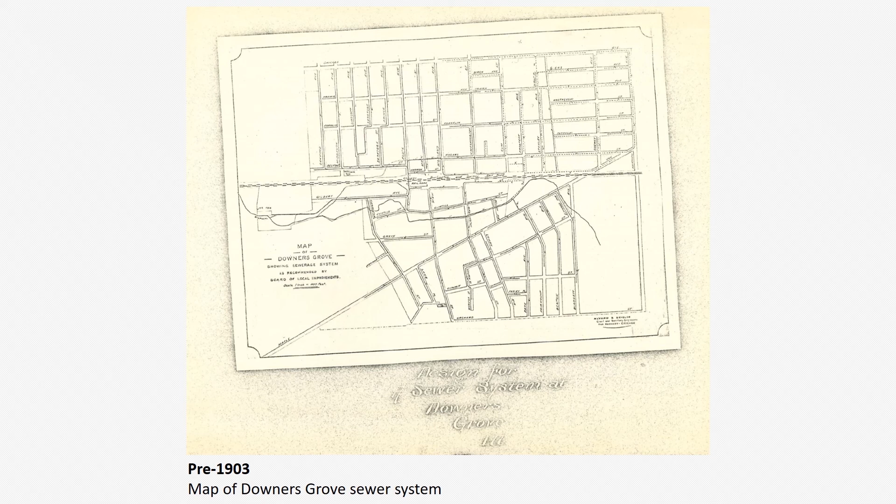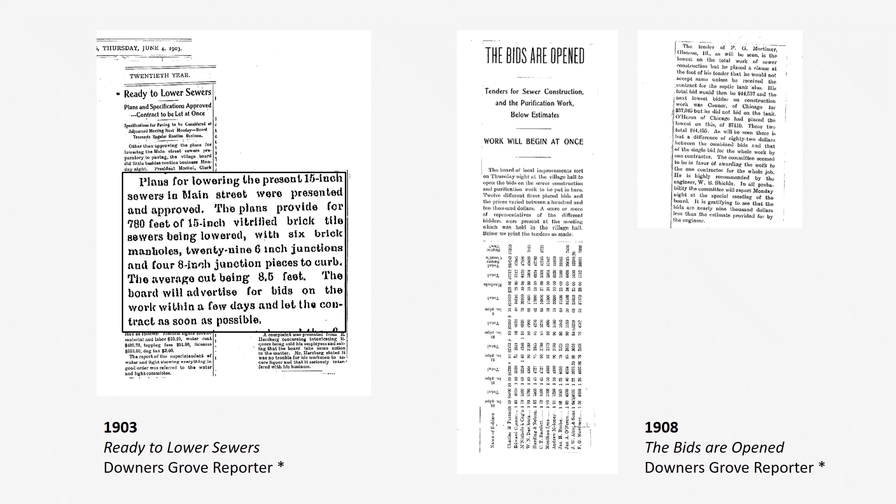In 1904, the disposal plant was placed into operation. The disposal plant was located where the ball field is in present-day Gilbert Park. It contained a septic tank and an intermittent sand filter.

District records show that over 47,000 feet of sanitary sewer in the village of Downers Grove dates back to 1904 and 1908. This district has only replaced approximately 2,000 feet of this pipe. The rest still remains in service today.

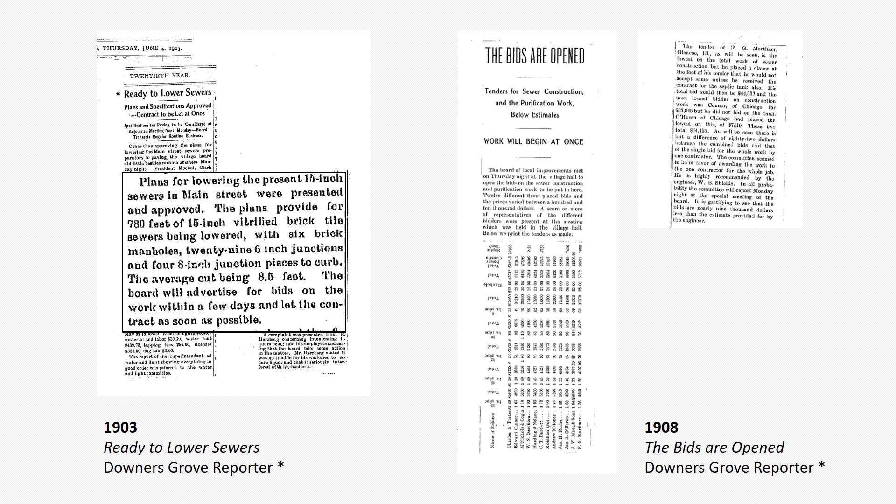Hello, this is Jessie Guad, Safety Coordinator. Now, let's take a look back at the first 30 years of the district's existence.

As the population of the village of Downers Grove and the surrounding areas grew rapidly in the early 1920s, the sewer system was extended into the Westmont area. As this was beyond the jurisdiction of the village of Downers Grove, the Sanitary District was formed in 1921 under the provisions of the Sanitary District Act of 1917.

Upon formation, the district acquired the sewer system and assumed operation of the village's disposal plant. This plat shows the original boundaries of the Sanitary District. The future location of the first treatment plant built by the district is also shown on the plat. It was located east of Belmont Road on St. Joseph's Creek.

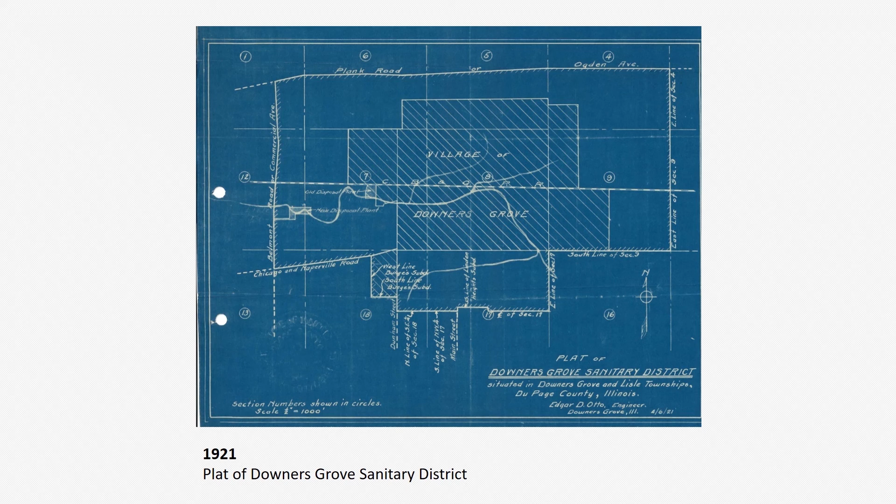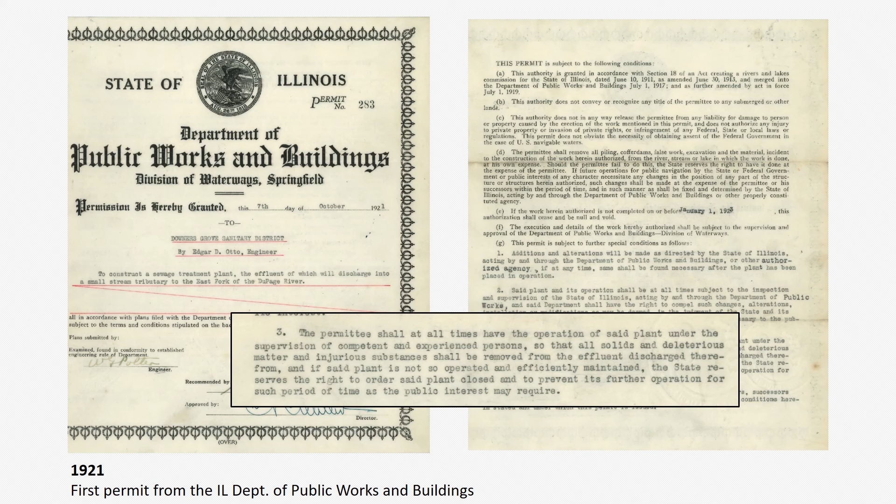In October of 1921, the district received its first construction permit to build the before-mentioned treatment plant. The permit was issued by the state's Department of Public Works and Buildings. The permit was also an operating permit, requiring the plant to be under the supervision of competent and experienced persons, and that all solids and deleterious matter and injurious substances be removed before the effluent was discharged to the creek.

Bids for the sewage treatment plant were opened at a Board of Trustees meeting in January 1922. The notice of award shown here indicates the plant costs $61,219.50, which would be approximately $4.4 million today.

The plant was built in 1922 to replace the old Village of Downers Grove disposal plant. The new plant was designed for a population of 5,000 and a flow of 0.35 million gallons per day.

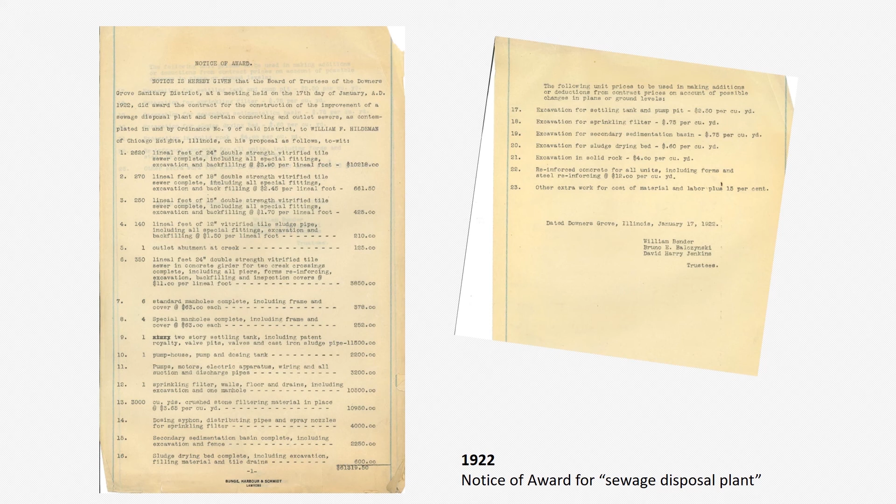Representatives from the Downers Grove Sanitary District were present at the first annual meeting of the Illinois Association of Sanitary Districts in January 1924. The association, which is now the Illinois Association of Wastewater Agencies, promotes the mutual interests of the wastewater agencies in the state of Illinois, including advocating on their collective behalf to the legislature and regulatory agencies.

Since that inaugural meeting in 1924, the district has been a highly active member of the association, having many employees who served on the executive board and as committee chairs.

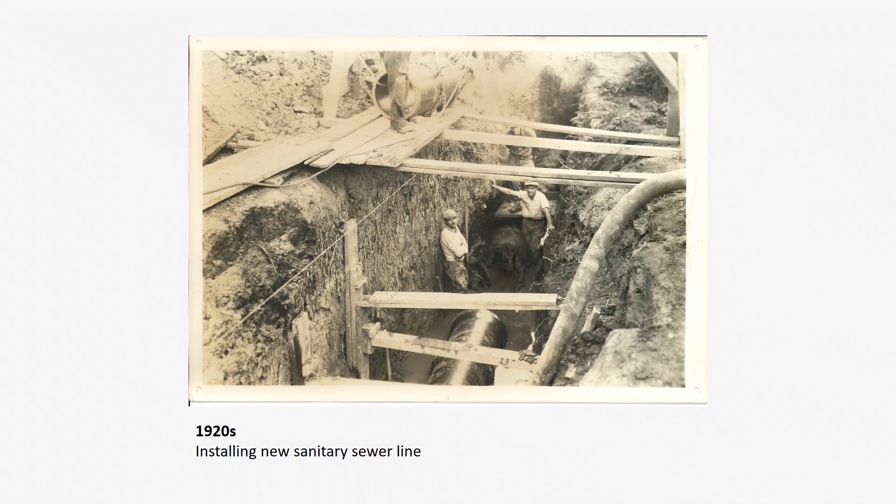The district began installing sanitary sewer mains in the mid-1920s, as shown in this photo.

Sewers completed under the district's first special assessment were installed in 1925. The district has completed 58 special assessments over the years, with the most recent in 2009. It still remains a mechanism by which a group of properties could become sewered today.

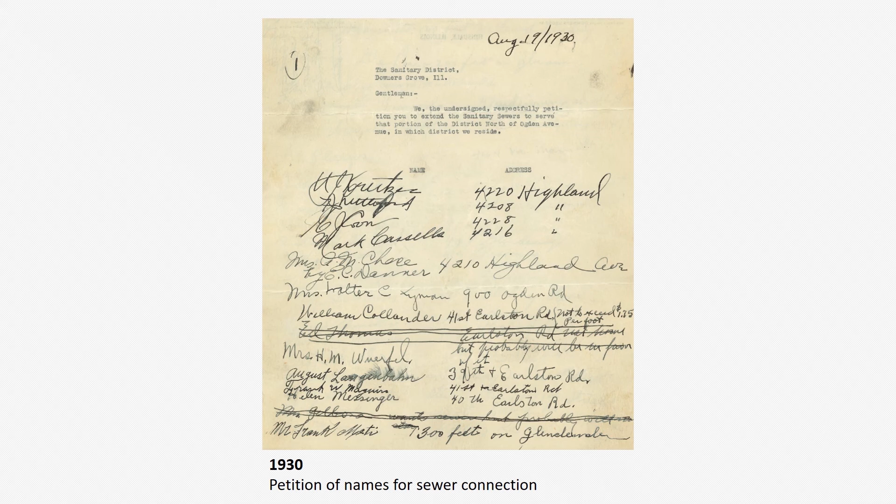By 1930, the population in the district had grown to over 10,000. The sewage treatment plant was expanded in 1931 to treat a flow of 1 million gallons per day. The plant contained Imhoff tanks, a sprinkling filter, and a final settling tank.

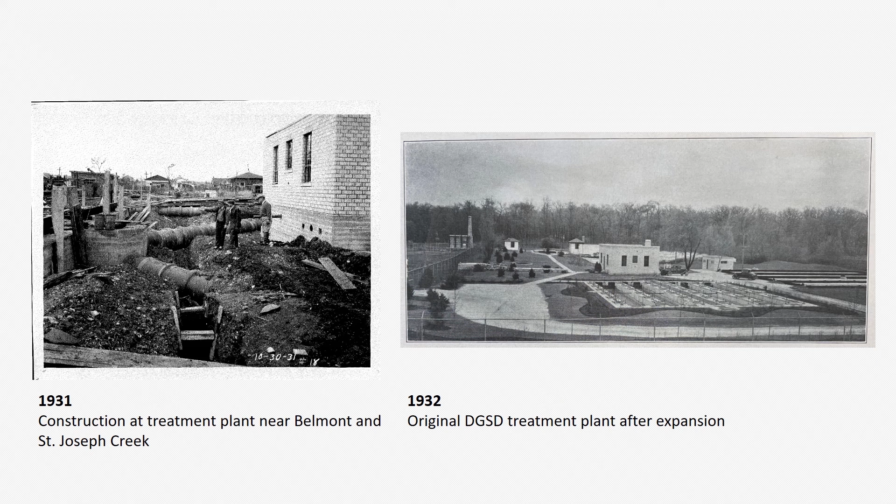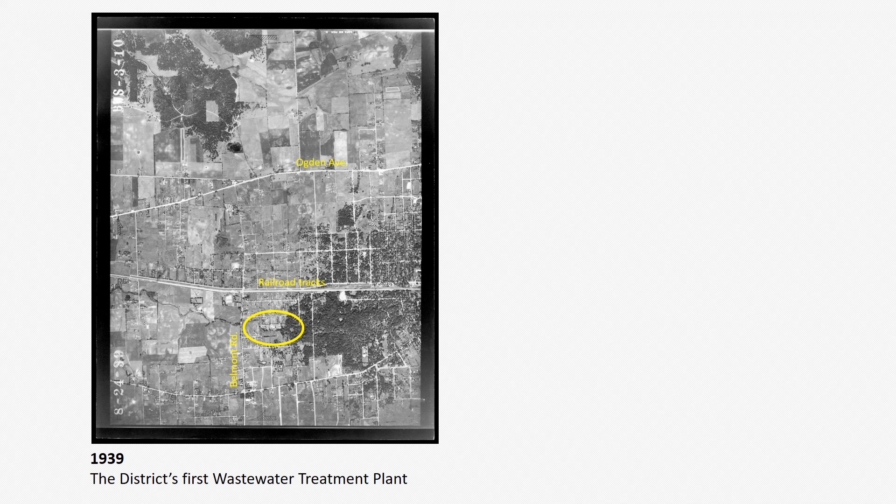This aerial photo from 1939 shows the location of the first sewage treatment plant constructed by the district, just east of Belmont Road on the north edge of St. Joseph Creek. By the early 1950s, the population of the district had grown to 17,500, and it was once again determined that this plant was overloaded.

At that time, the district began planning for a second wastewater treatment plant. The treatment plant at this site was used until the mid-1960s, at which time the plant was decommissioned and the site was donated to the Downers Grove Park District to become a public park.

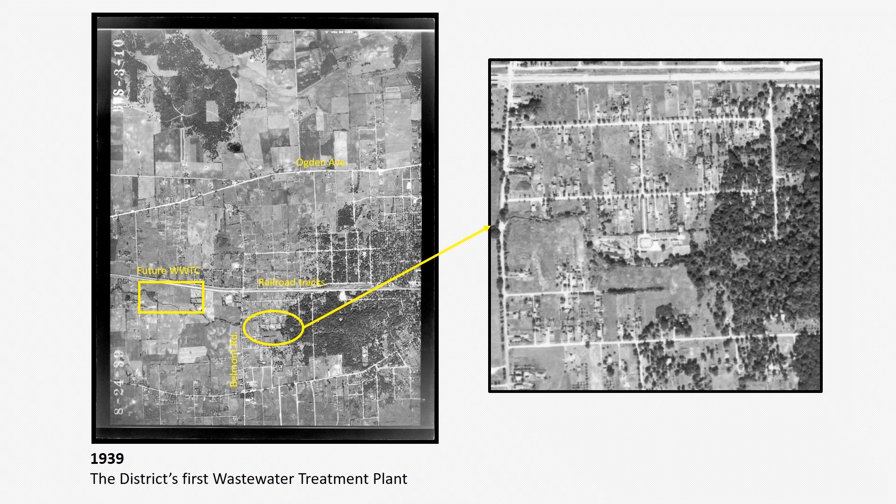Hi, this is Stephanie Choney, Laboratory Analyst. Let's take a look back at the district in the 1950s and 1960s.

As the district continued to grow, a new treatment plant was constructed in the mid-1950s. The photo on the left shows construction of an anaerobic digester. The photo on the right shows construction of the main control building and the primary settling tanks.

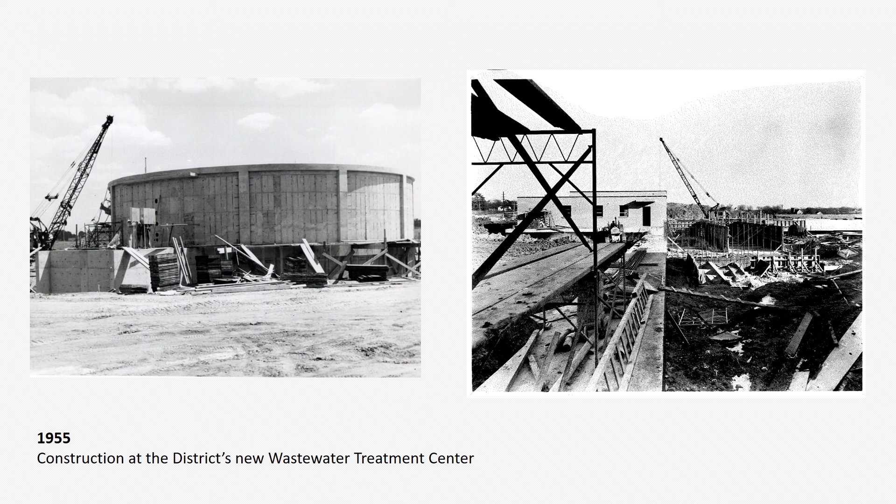In addition to primary treatment, the plant contained an activated sludge process, which provides full secondary treatment and is a much more reliable technology than the treatment processes at the district's first plant. This plant would have been designed to remove 90% of the biological oxygen demand and the total suspended solids in the wastewater prior to discharge.

Rather than discharging to the creek along the south edge of the plant, a 1.7-mile-long outfall sewer was constructed that discharges directly to the east branch of the DuPage River.

When bid in 1955, the plant cost $576,000 and the outfall sewer cost $276,000. These two combined would be approximately $16.1 million in today's dollars.

This photo shows a bucket machine being used to clean a sewer. The district purchased this machine in 1956 for less than $1,000 from Trojan Tool Company.

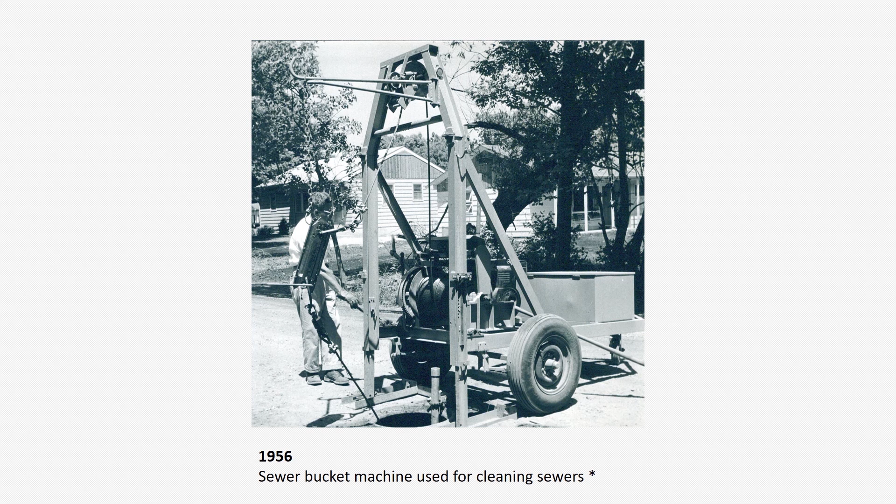Today, the district owns a combination jetting and vacuum truck and a jetter truck. A quarter of the sewer system is cleaned annually, and sections which have a history of blockages are cleaned every 3 to 6 months.

The district installed several lift stations in the 1950s and 1960s, as indicated here. In lift stations, pumps are used to lift the wastewater to a higher elevation so that it can be discharged to a gravity sewer for transport to the wastewater treatment center.

The Earlston lift station remains in service today. The Venard and Liberty Park lift stations were replaced at their original sites in 2011 and 2018, respectively. The Centex lift station will be replaced this fiscal year.

The district owned and operated a few other lift stations in this period that were eventually removed from service. This was accomplished by the district constructing larger diameter trunk sewer lines that allowed flow by gravity.

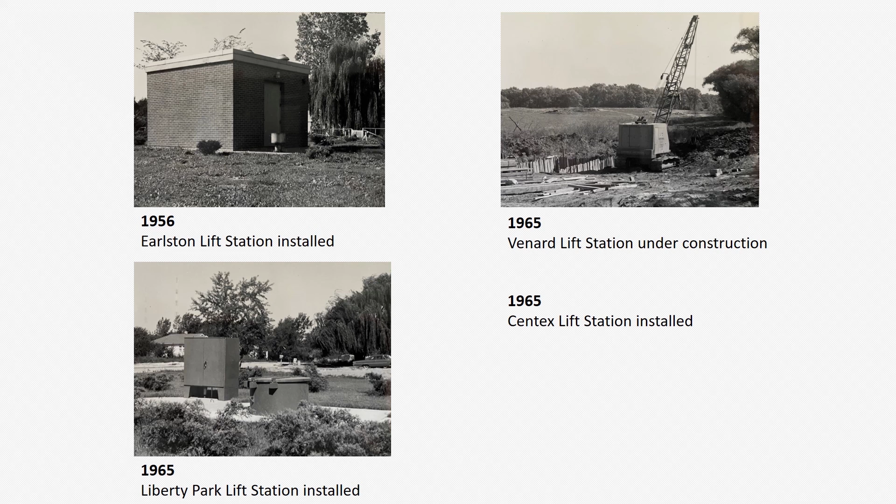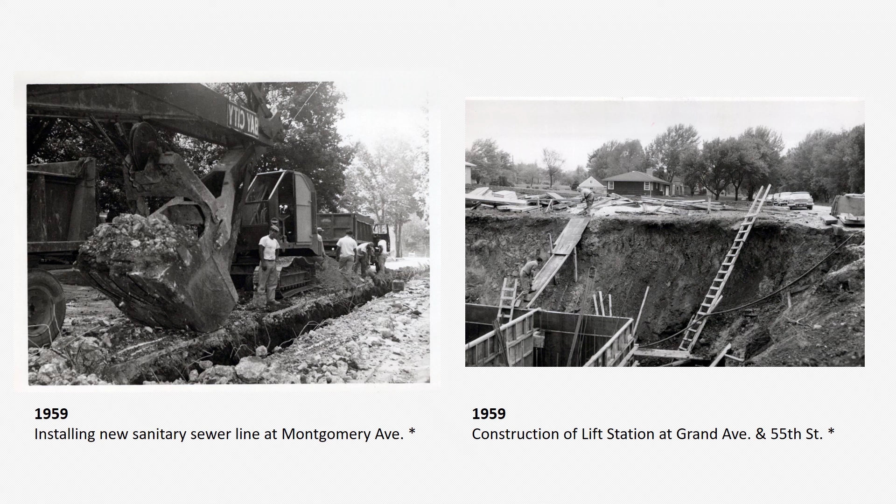We know from the Board of Trustee meeting minutes that Mr. McEwen gave a tour of the plant during a DuPage County Sanitary District officials meeting on June 1, 1960, and during a state association meeting in the fall of 1961. Just before Christmas 1961, the district broke ground at the new wastewater treatment center to add a second anaerobic digester.

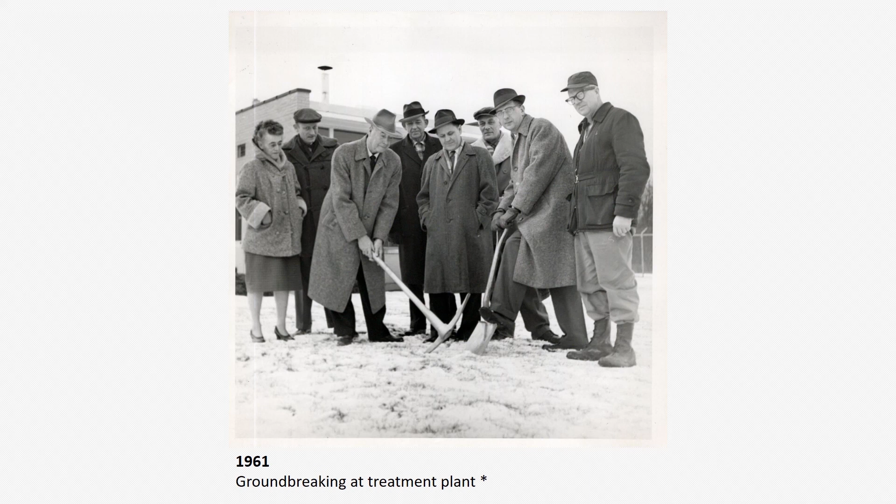In addition to the 1961 digester project, two other construction projects occurred at the wastewater treatment center in the 1960s. One project expanded the plant to serve a population of 35,000 and treat a flow of 4 million gallons per day. The other project added secondary clarifiers and chlorination facilities.

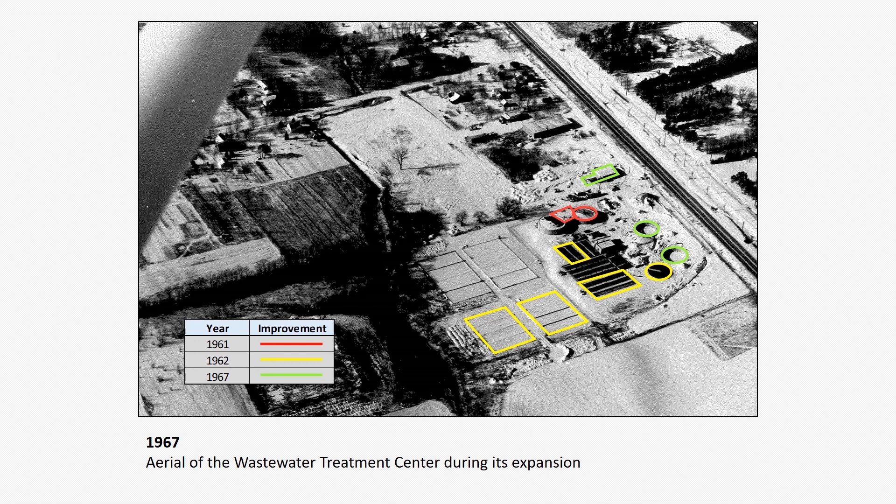The chlorination facilities were installed to disinfect the effluent prior to discharge to the river. The construction of the chlorine contact tank is in the foreground of this photo, with secondary clarifiers in the background. This chlorine contact tank was converted to a clarifier in the 1970s when a larger chlorine contact tank was constructed.

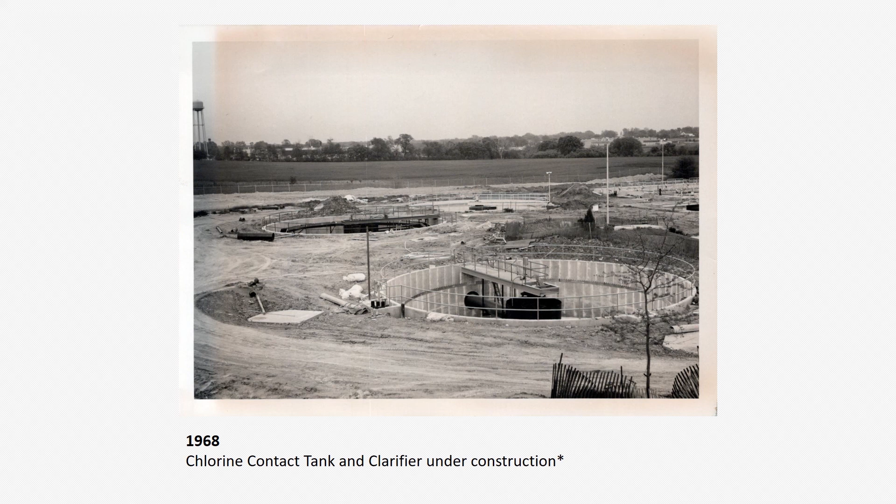The United States Environmental Protection Agency was created on December 2, 1970 by President Richard Nixon. The creation of the United States EPA led to new programs and regulations to protect our nation's waterways, which in turn impacted the level of treatment that the Downers Grove Sanitary District needed to provide.

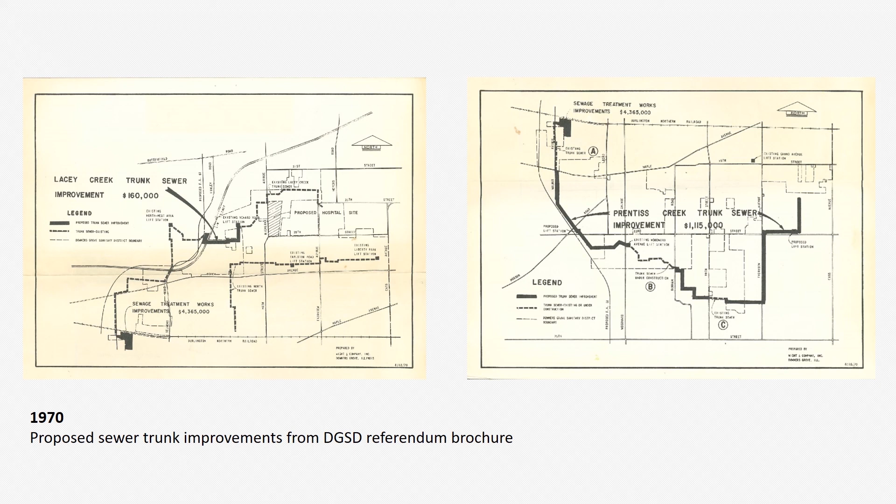In addition to pending new regulations, the population of the district service area was increasing in the 1970s. In order to provide capacity for the development decisions made by local municipalities, the district planned construction of new trunk sewers and lift stations in the Lacey Creek and Prentiss Creek areas of the district service area, as well as an expansion to the wastewater treatment center.

4 of the district's lift stations were constructed in the 1970s.

This aerial photo taken in 1983 shows the wastewater treatment center after 2 construction projects which were completed in the 1970s. During this time period, the plant was expanded to serve a population of 80,000 and treat a dry weather flow of 9.6 million gallons per day.

In addition to expanding the plant's capacity, tertiary treatment was added, which had been designed to increase the total removal of biochemical oxygen demand and total suspended solids through the plant from 90 to 95%.

In the mid-70s, the district relocated its administration offices from downtown Downers Grove to a newly constructed administration center located on Curtis Street, where the district offices have remained.

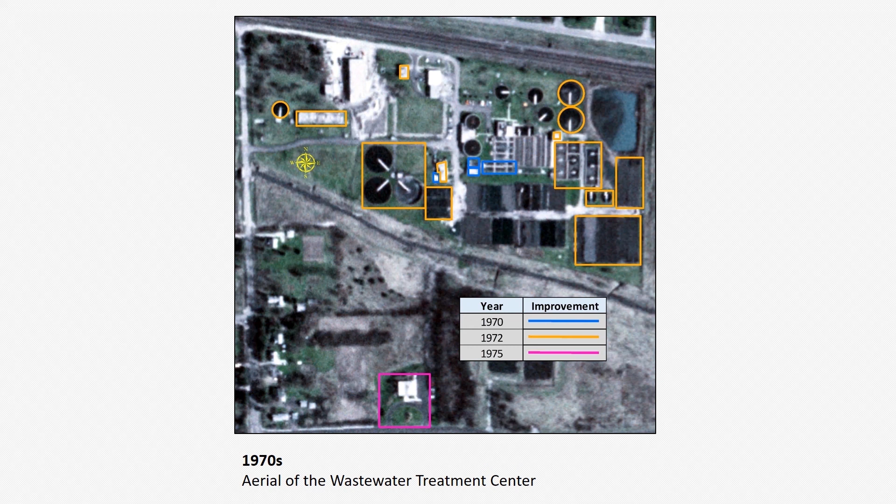The Clean Water Act was passed in 1972. As a result, the United States EPA began issuing discharge permits to treatment plants through the National Pollutant Discharge Elimination System, or NPDES. The United States EPA signed the district's first NPDES permit on December 30, 1974. Eventually, United States EPA authorized the Illinois EPA to administer the program in the state of Illinois. The district continues to operate under the NPDES program.

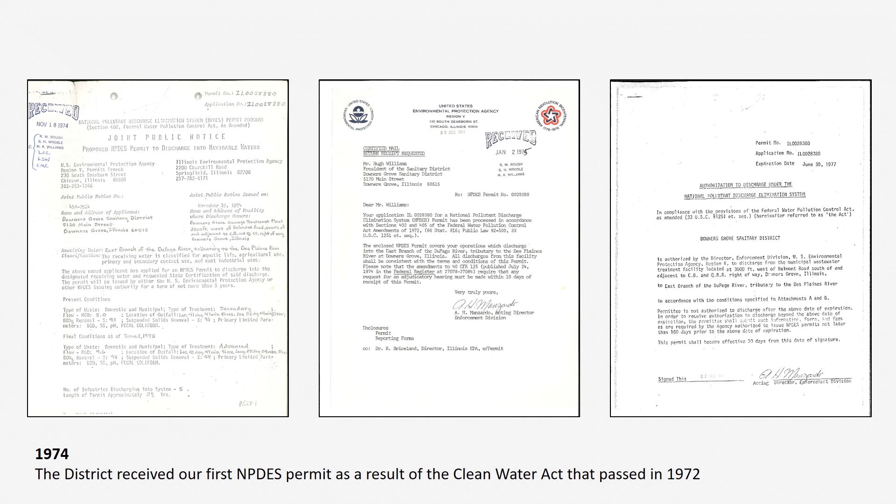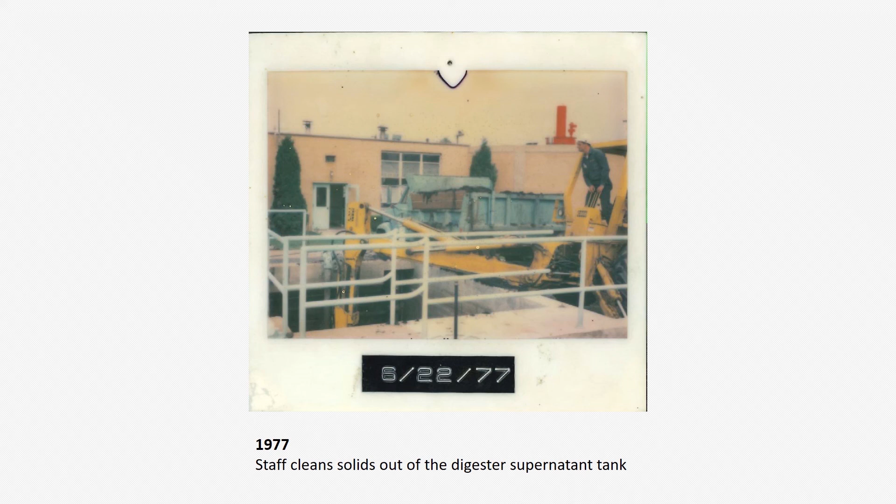This pulverizer was used to screen the sludge. The district's sludge management plan continues today under our biosolids distribution program. Biosolids may be picked up at our pickup station on Curtis Street in Downers Grove, or the district will deliver biosolids free of charge.

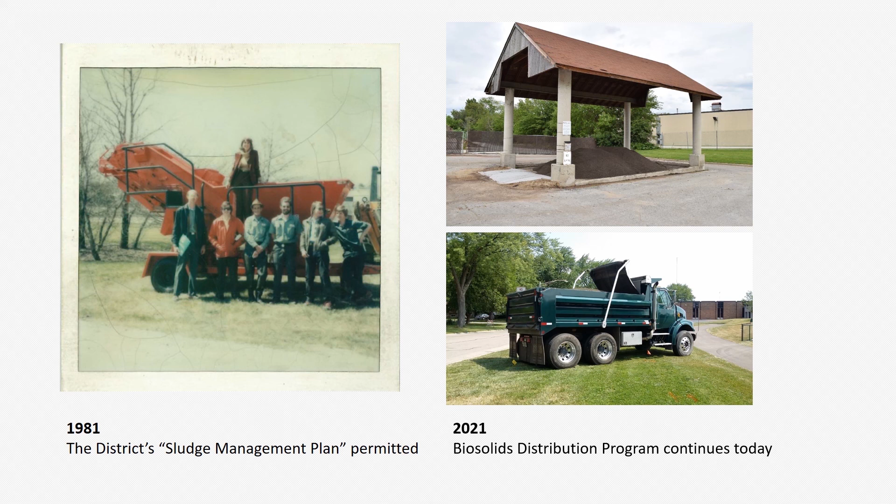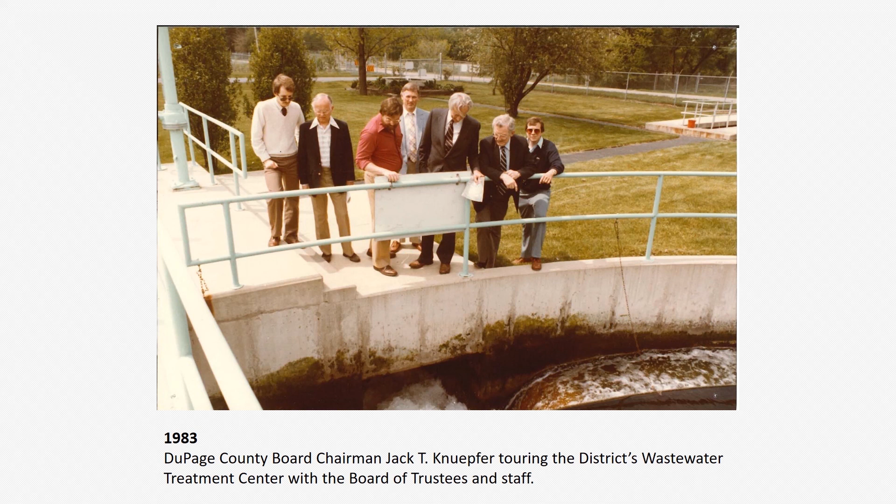During a 1983 tour of the district's wastewater treatment center, the DuPage County Board Chairman, the District Board of Trustees, and district staff watched treated effluent water leave the chlorine contact tank.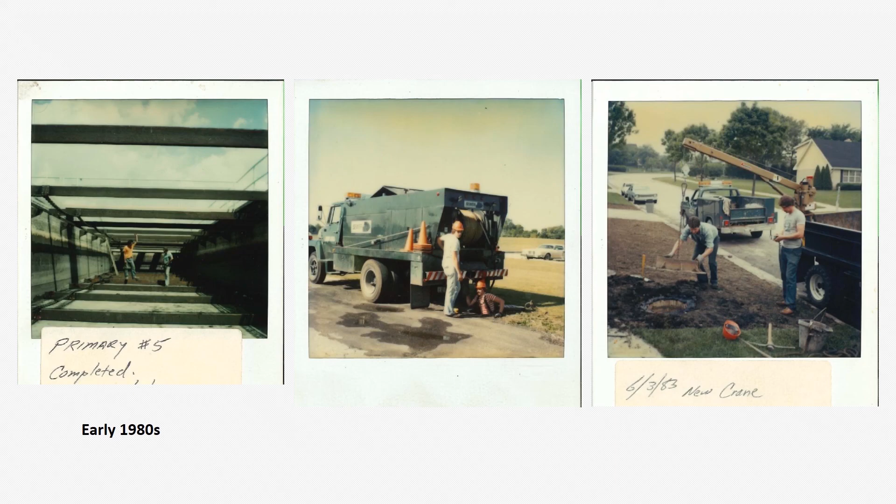In the 1980s, the wastewater treatment center underwent 3 phased construction projects costing a total of $19 million, which would be approximately $55 million today. The dry weather flow capacity of the plant was increased to 11 million gallons per day to serve a population of 94,000. The expansion of the activated sludge plant was also needed to meet ammonia limits, which became effective in 1988.

Two sand filters were added to supplement the existing tertiary treatment. Throughout its history, the district has experienced significant increases in flow at its treatment plants during wet weather events, even though it has a separate sanitary sewer system, which is not connected to any stormwater inlets. This increased flow during storm events is due to inflow and infiltration, or I&I, into the sewer system.

While the district had made improvements over the years to address I&I, by the 1980s the amount of flow had increased to a point where the district's system could just not handle it. At this time, the district spent approximately $10 million to construct trunk sewers and interceptors to relieve its overloaded sanitary sewer system during storm events. This would cost approximately $28 million today.

As part of the 1980s construction project shown here, an excess flow pumping station and excess flow clarifiers were added to the wastewater treatment center to treat the excess flow received. At the completion of the 1980s projects, the wastewater treatment center had the capacity to treat a total of 80 million gallons per day during excess flow events.

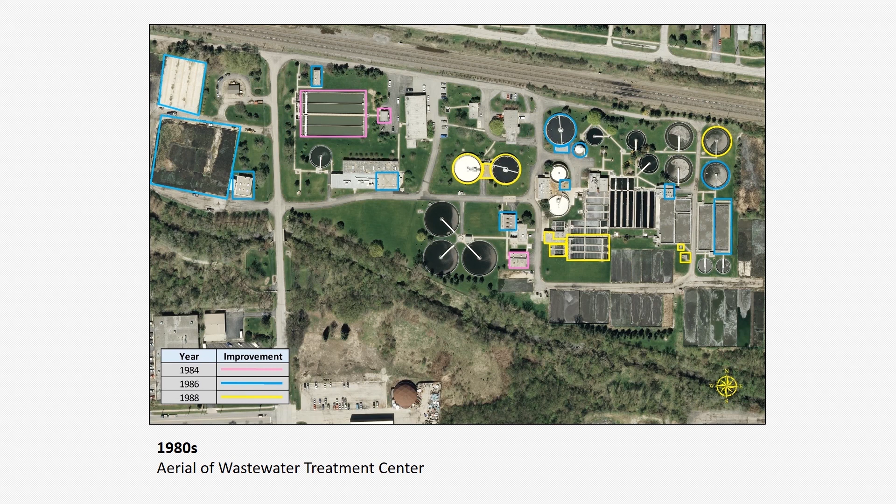The district has long practiced strong stewardship of public funds. All wastewater treatment center and sanitary sewer improvements constructed during the 1980s were funded with grants and district funds without the added cost of issuing bonds.

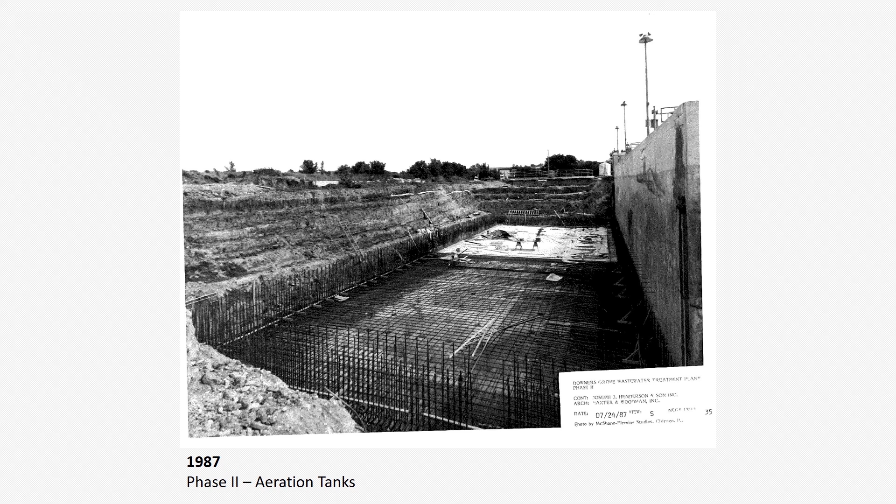Construction of the excess flow clarifiers was started in 1985. Construction began on the district's final aeration tank in 1987. This tank was needed in order to meet the ammonia limits. Construction was started in 1989 on the grit building addition and two additional grit removal tanks.

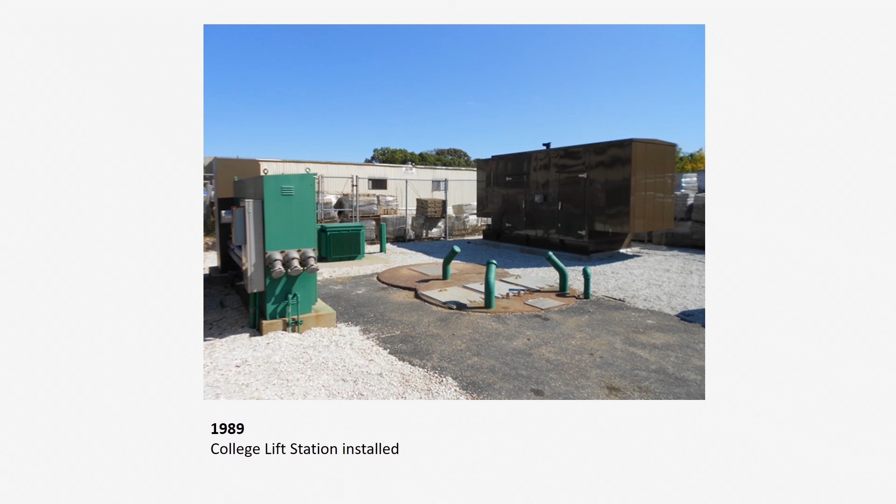In 1989, the College Lift Station was installed. In 1990, the district hosted its first public open house. The open house was held annually thereafter, with the district celebrating its 30th annual open house in 2019. The open house is a great way for district customers to see how their local treatment center operates and how their money is used. It's also a unique educational opportunity for scout troops and local students.

Unfortunately, the COVID-19 pandemic has impacted the district's ability to host open houses. The open house was canceled in 2020 and in 2021. In lieu of holding an open house, the district will host private tours for anyone who is interested. The district does look forward to the future when the annual open houses can be held again.

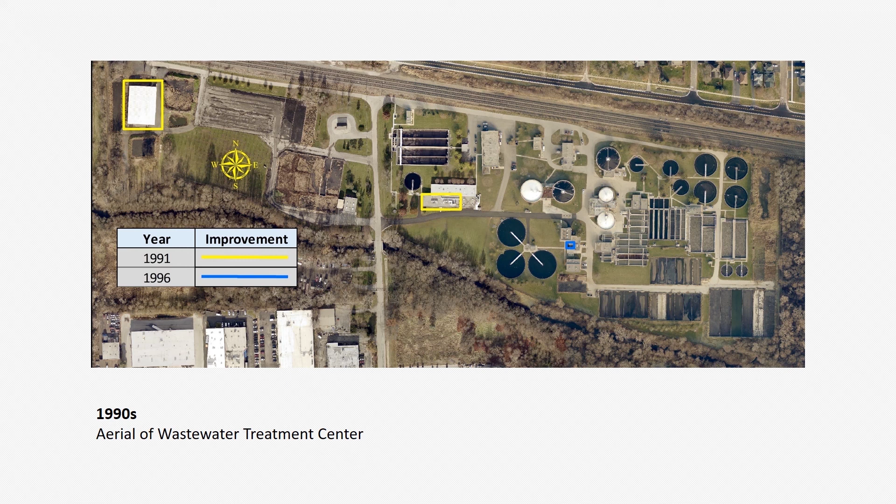Despite previous work to address I&I in the district's collection system and additional excess flow treatment facilities being constructed in 1984 and 1996, the district's collection system and the wastewater treatment center continue to be inundated during record rainfall and flooding events. The district recognized that a different approach was needed to address this I&I and the issues it causes.

The district therefore implemented its sewer flow monitoring program in 1996, its overhead sewer cost reimbursement program in 1997, and its sanitary sewer backup reimbursement program in 1998. Under the overhead sewer program, the customer's internal sanitary plumbing is upgraded to protect the house from sewage backing up into it in the event of a blockage or wet weather surcharging in the public sewer main. The overhead sewer program also targets I&I removal, as illegal storm connections such as sump pumps and downspouts must be eliminated in order to participate in the program.

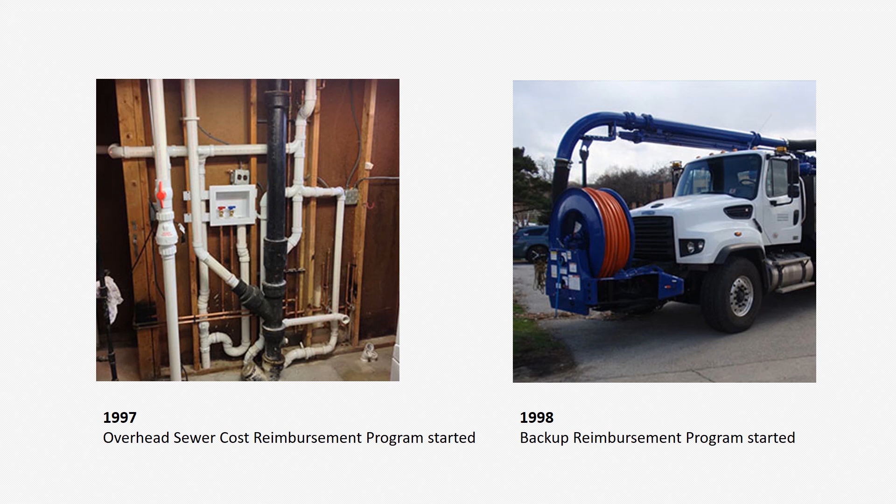The district's facility planning area was last amended in 1998. The facility planning area delineates the boundaries of the district's future service area and was approved by the Illinois Environmental Protection Agency through the Northeastern Illinois Planning Commission, which is now the Chicago Metropolitan Agency for Planning.

Today, the district serves customers in the village of Downers Grove, part of the village of Westmont, and portions of Woodridge, Lisle, Darien, Oakbrook, and Lombard. The district has a long history of intergovernmental cooperation with each of these municipalities, as well as with the Park Districts, DuPage County, and the Forest Preserve District of DuPage County on issues of mutual concern and benefit.

Hi, this is Nick Whitefleet, lead mechanic.

I'm going to share with you the district's near history. Growth in the district's service area slowed after the mid-1980s. Today, the district serves approximately 65,000 people, which is significantly less than was anticipated at the last expansion of the district's wastewater treatment center. Moving forward into the 21st century, the district's focus turned from expansion to sustainability, the best use of the district's resources, and maintaining the district's existing infrastructure.

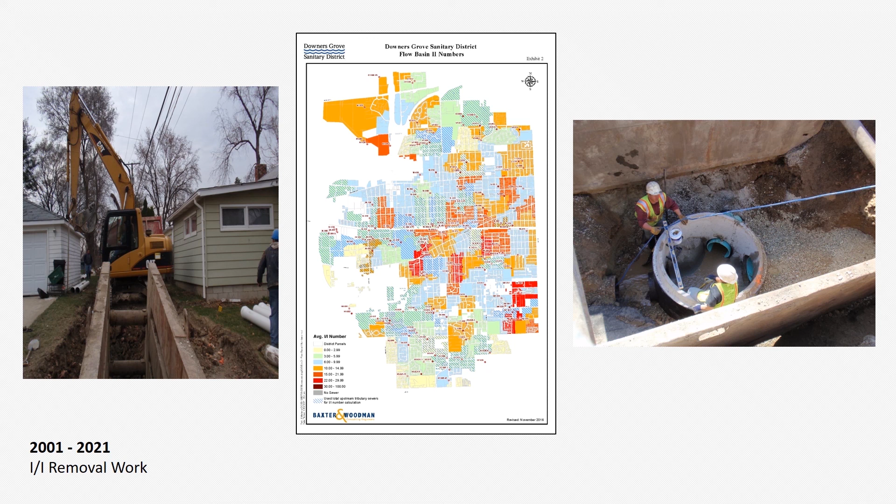In 2002, the district implemented its Building Sanitary Service Repair Assistance Program, also known as BSRAP. Under the program, the district will repair, rehabilitate, or replace a customer's building sanitary service. This program provides the district with a unique opportunity to remove sources of I&I from the district's collection system while repairing the customer's service line.

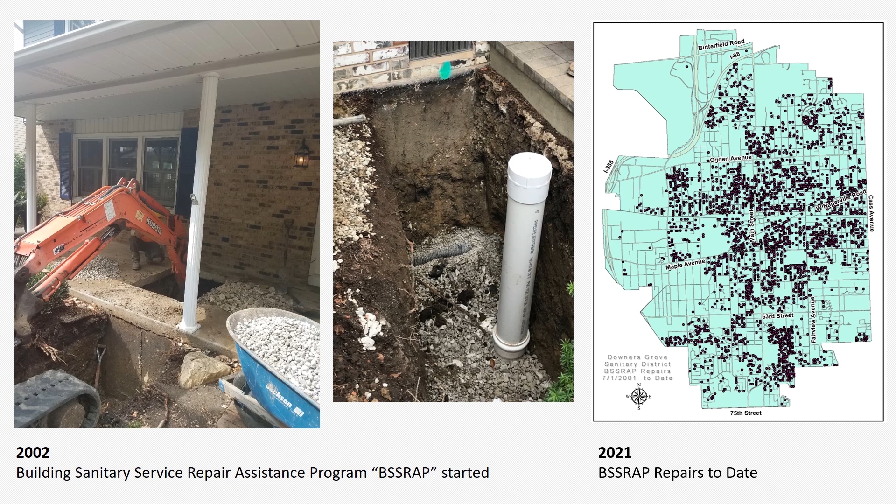The photo on the left shows a BSSRAP repair in progress. The photo in the center shows a cleanout installed on a service lateral during a repair. Since the program's inception, over 3,600 repairs have been made, as shown in the figure on the right. The district typically spends between $600,000 and $750,000 annually on BSSRAP repairs. The district's BSSRAP program is one of the few programs like this in the country.

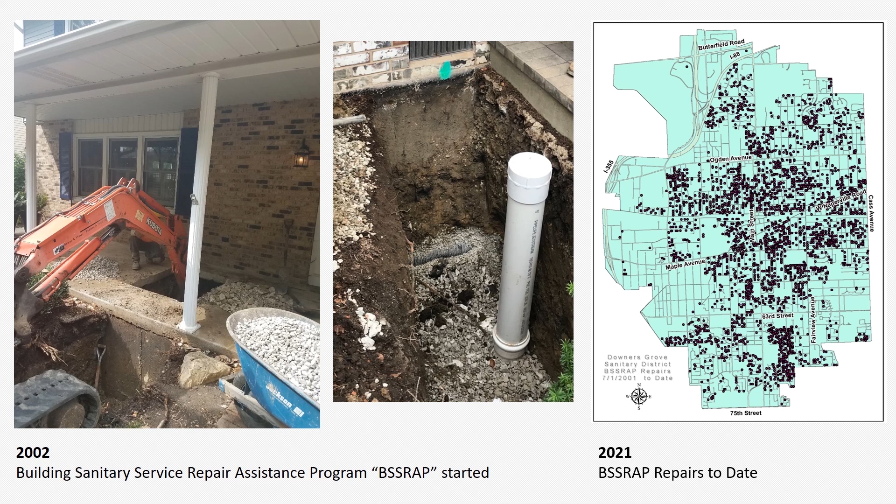The district is a founding member of the DuPage River Salt Creek Work Group, which was formed in 2005. District staff have been active in the work group from its inception, serving on the board and as committee chairs. Participation in the work group became a condition of the district's NPDES permit in 2015. The permit condition also delayed costly phosphorus limits in exchange for requiring the completion of watershed projects, which will have a greater impact towards improving aquatic life and water quality.

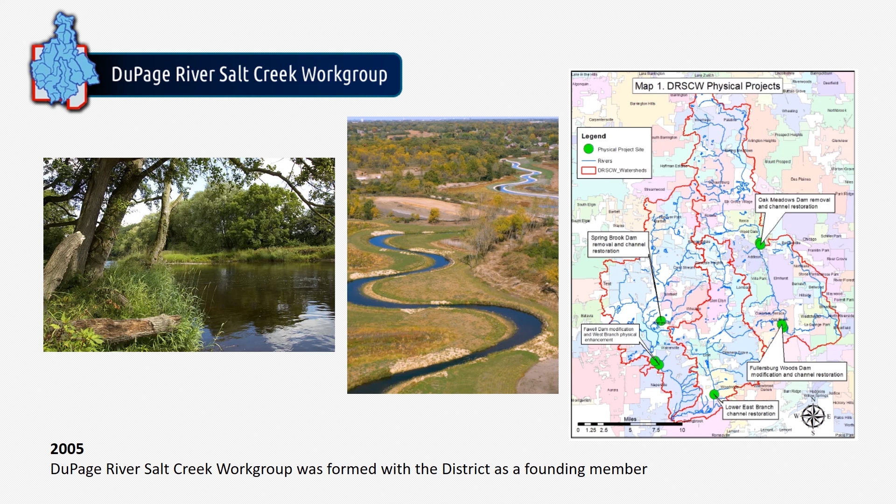Starting in 2008, the district began a series of improvements at the wastewater treatment center to decrease its energy consumption. Improvements included increasing the energy efficiency of the aeration system used in wastewater treatment and installing geothermal heat pumps that utilize the treated effluent water to heat and cool buildings.

In 2010, the district began accepting grease trap and high-strength waste, which greatly increased production of biogas in our digesters. The increased biogas production has allowed the district to install and operate 2 combined heat and power systems, which utilize the gas to produce electricity.

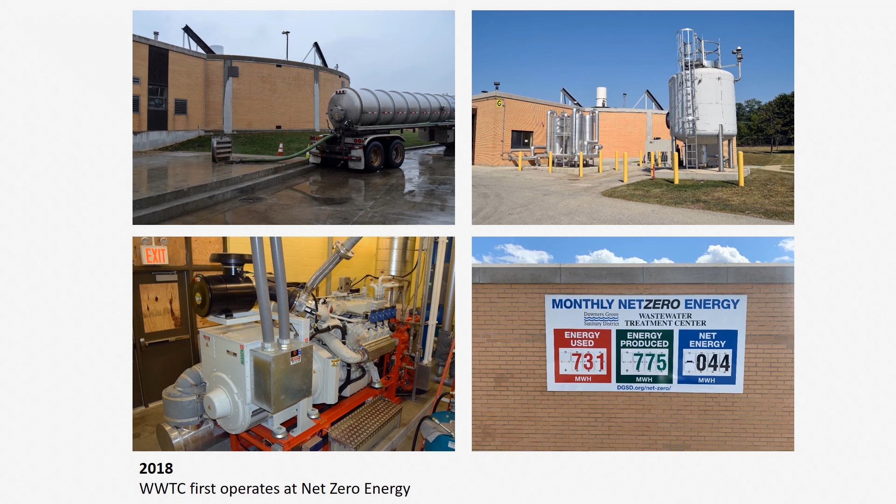The energy and sustainability improvements made over the course of a decade resulted in the district's wastewater treatment center becoming a net zero energy facility, meaning that the facility produces enough renewable energy to meet its own energy consumption.

In 2016, the district was recognized as a utility of the future today by the National Association of Clean Water Agencies, the Water Environment Federation, and the Water Research Foundation. In 2020, Scarce presented the district with an Earth flag. These accomplishments recognize the district for its sustainability and energy efficiency efforts.

Thank you for joining us as we looked back over the first 100 years of the Downers Grove Sanitary District's history. We look forward to providing the highest level of quality service to our customers and the environment for the next 100 years. More information on the services and assistance programs offered by the district may be found on our website at dgsd.org.